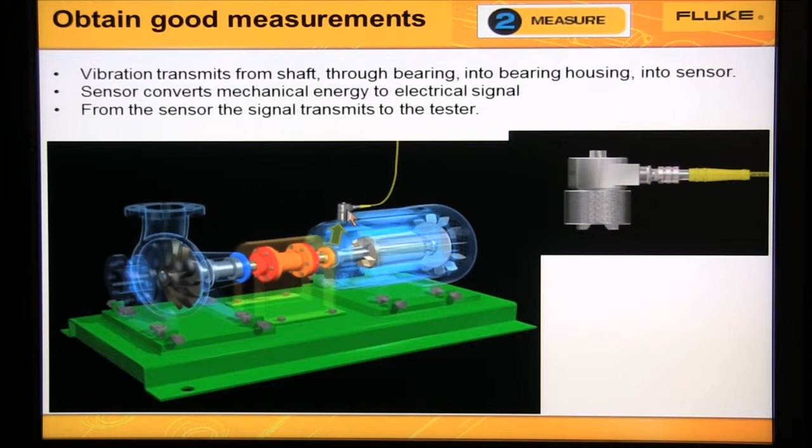Vibration transmits from a rotating shaft through the bearing, into the bearing housing, and into our sensor. The sensor converts mechanical energy to electrical signal. From the sensor, the signal transmits down the cable to our tester.

Rotating shafts vibrate in three directions: up and down, back and forth, and end to end. The triaxial sensor measures all three directions simultaneously. Mount the sensor either on the top or on the side or on the end. It doesn't matter, whichever is the best.

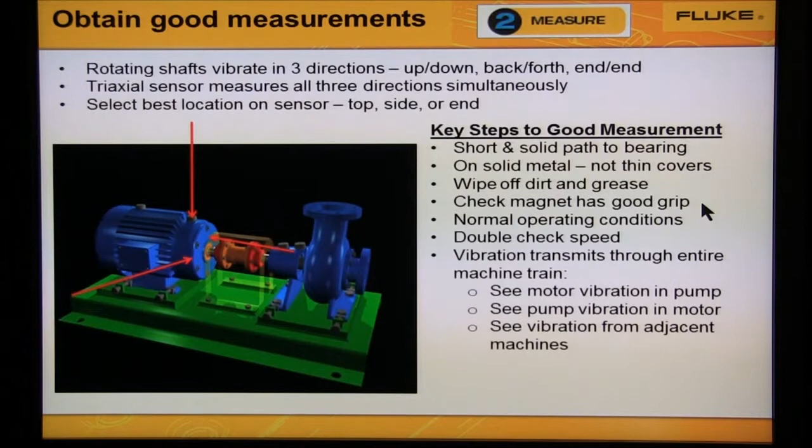But keep in mind some key points. And these key points are: mount the sensor on solid metal in direct path to the bearing and make sure the magnet is securely mounted. Make sure the machine is running at normal operating conditions, and keep in mind that vibration transmits through the entire machine and through the foundation and from adjacent machines.

The 810 is designed to help you obtain good measurements. There's three screens that make this process easy. On the first screen, use the machine icon and select the bearing location the sensor is on. Notice that the current bearing location is for bearing number 2, which is on the motor.

To start the measurement, we would press Measure. To go to the next location, we would press Next Location. The image on the right shows how sensor location numbering follows the flow of energy down a machine. Use the quick reference guide that helps the user make correct measurements while in the field.

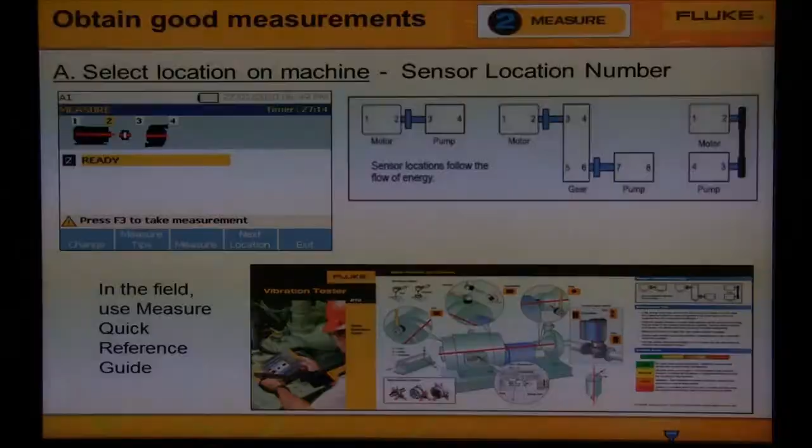Sometimes the machine icon that's on the tester looks different than your machine. The machine icon is simply a guide to help you select the bearing locations for your measurements. So sometimes we'll show a horizontal machine that will represent both a horizontal machine and a vertical machine.

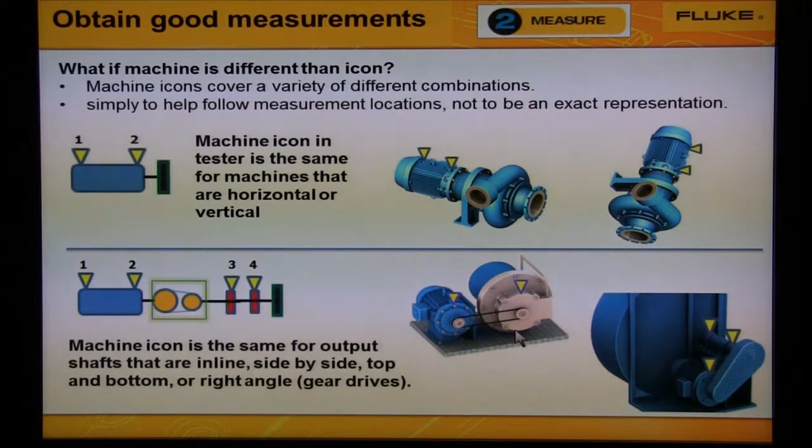Or for a belt-driven machine, we might show the motor, belt, and fan as in one line, where in reality, the motor and the fan or pump are side by side or on top of each other.

We talked about the first screen, which was to select the location of the sensor. The next two screens are to, number one, select the orientation of the machine. So we would use the dial to select either the end of the machine, the top or bottom, or the side.

Then we would select the direction of the cable coming out of the side of the sensor, so if the cable is coming out perpendicular to the shaft or in line with the shaft. These three screens help the 810 know which direction the three sensors in the triax are measuring the three planes, or the movement of the machine.